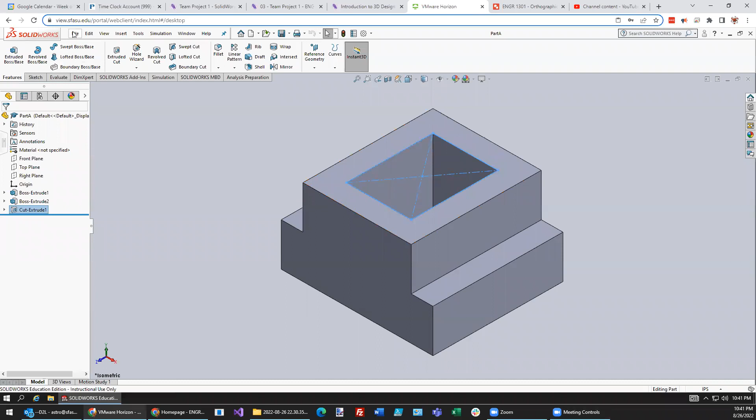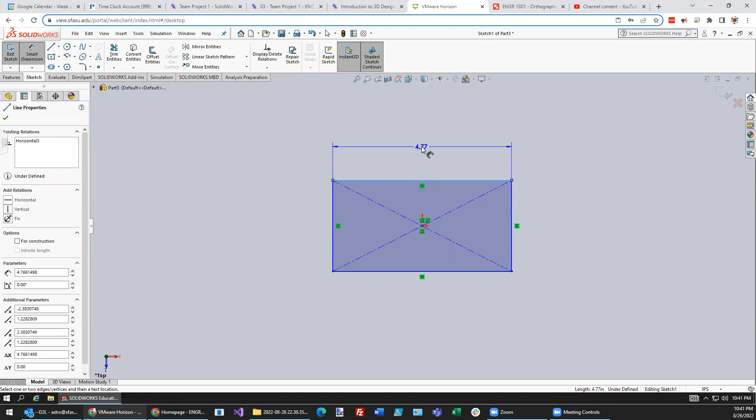We already said that this one right here is going to be 20, and this one over here is going to be 12. Notice that those blue lines become black once they're fully defined.

At this point, it's time to extrude. We're going to go 4 inches up like that, and we agree to those things.

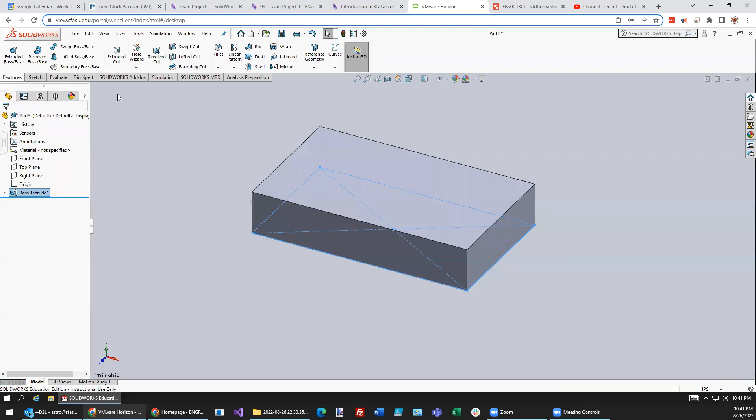Now the next thing we need to do is cut a piece right in here. I think what I'm going to do this time is not use the center rectangle. I'm going to start on that plane and use the corner rectangle so that I can snap it here on the edge, and that's where it's going to go.

Now if you look at the original sketch over here, it looks like we need to go 4 this way. We also need to go in 4 that way. So that makes things a little bit easy to remember, because what we want is from there to there to be 4 inches.

How close were we? A little bit big on that. And we also want to go from here to here. How was I on that one? I think I didn't make it big enough.

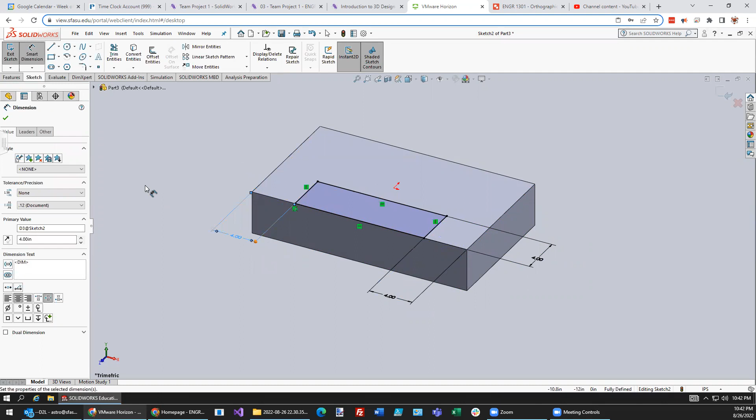That's okay, we were just roughing in the rectangle. Now we have that fully defined rectangle. At this point we could click exit and hopefully it'll just cut right through it, and we agree.

The next thing we need to do is draw that wedge. So let's first make a block and then cut away on that block. Let's extrude that, select this surface.

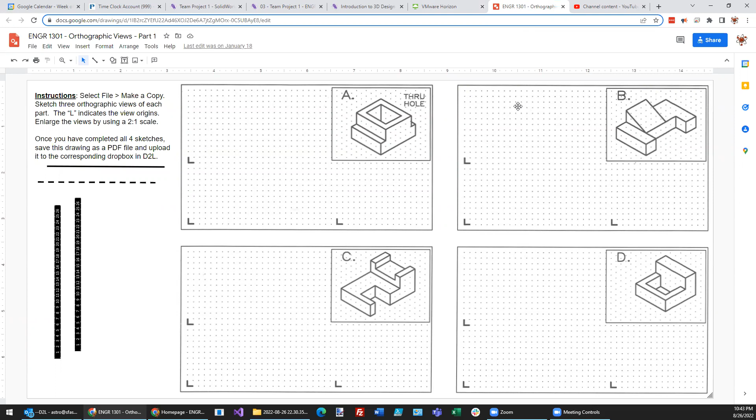I'm going to say corner rectangle again so I could snap to that corner and go across this way. I need to extrude that up, and I guess I need to figure out how far it is over. Now it's going to be, it looks like 8 units over from this side if I look carefully at that. So let's see if we can measure that and make it 8 inches.

So smart dimension, going from here to there. How did I do? Okay, well it's supposed to be 8 inches. Didn't quite do it there. Everything is black around here, which means it's fully defined, so that's a good thing.

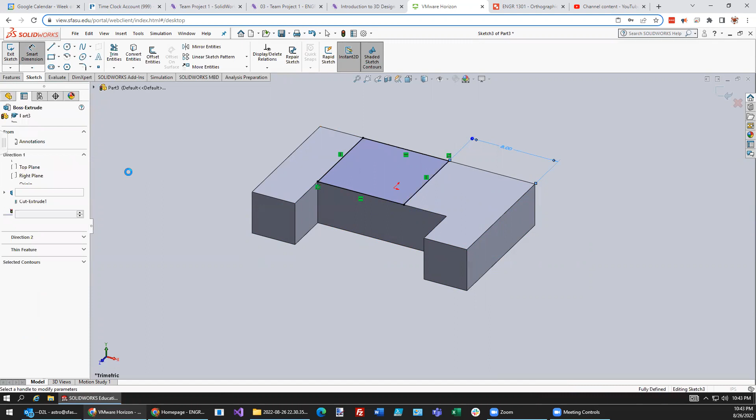Exiting will extrude it up. And did we go high enough? We needed to go 4 units, and we did.

The last thing we need to do is cut away. So what we can do is right click and go over to zoom, pan, and rotate, or just hold down the middle mouse button, and you can come over in this direction.

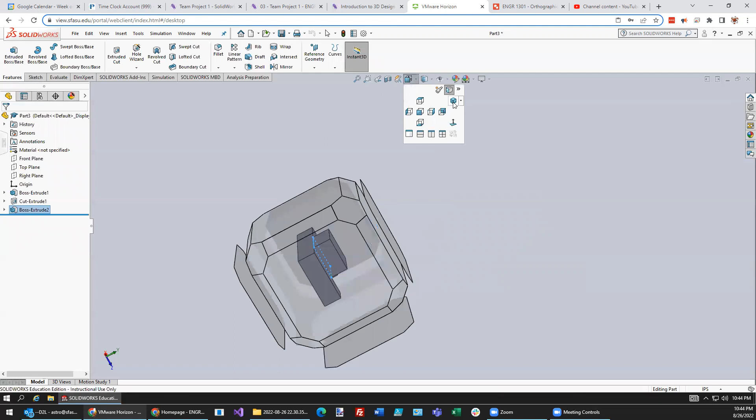Now if that's not good enough for you, you could go down here and say let's first look at it like this. And then maybe we could just face it like that. So let's click here and say I want to look at it from this side. And you see a preview over here to the right.

So now what I'm going to do is cut away on this. I'm going to draw a triangle and cut it all the way off there. So I want to select that face.

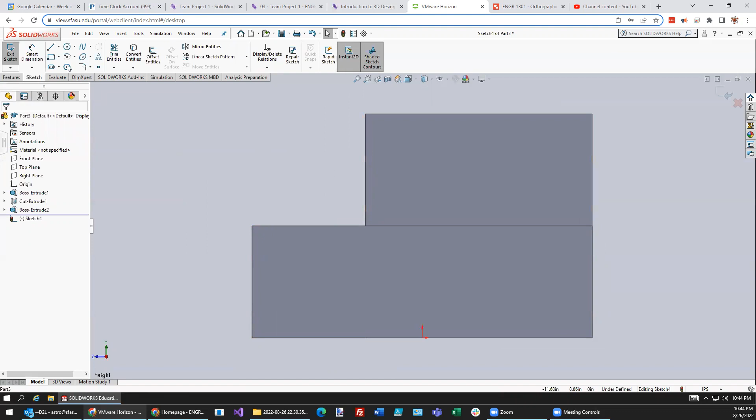And to make a triangle, we're going to use the line tool instead. Snapping to this corner, snapping to this corner, and then snap and snap. And then we say we like that triangle.

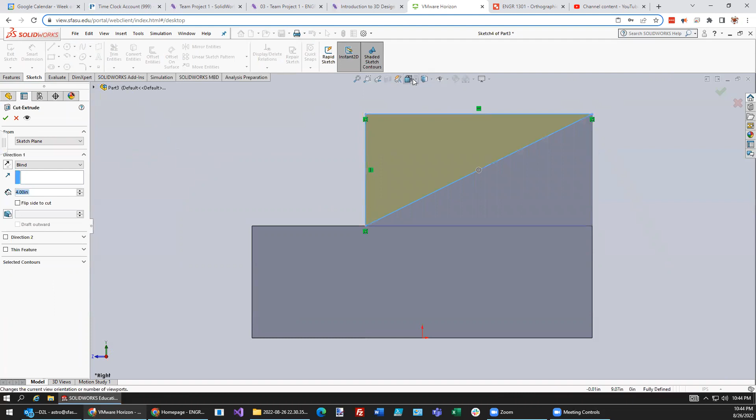Let's see if it'll cut it away for us if we hit exit. Now we can't really see it too well, so we go back up here to the view and select isometric and realize that we're not going all the way through. So let's change that to 8 units, cutting all the way through, and we're done.